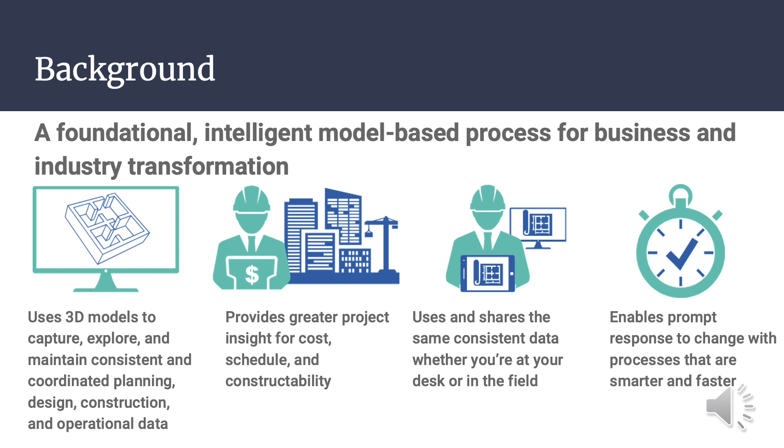As you can see, BIM can be applied into different construction phases, for example, the design, construction, planning, programming, or even the renovation phases as well.

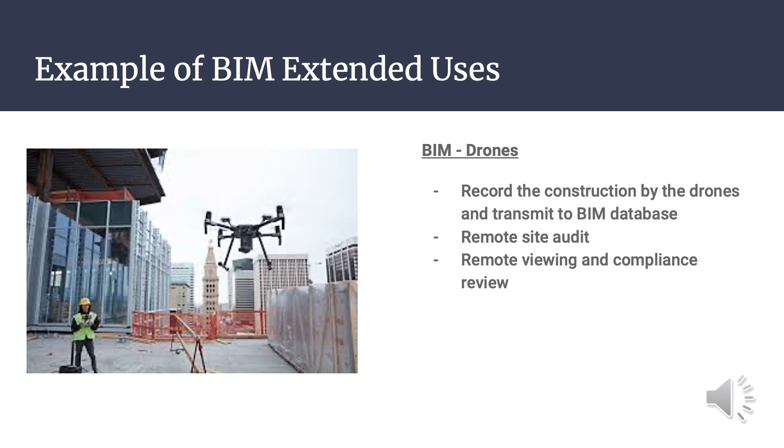BIM drones is one typical example which combines two concepts, using drones for permanent construction records, and assisting with creating 3D models in the BIM model as well.

Now I will talk about the BIM AR concept. BIM AR is a mixture of the virtual and real environment, where AR allows an experience of a virtual object to be displayed in the BIM model. This mixture can provide an additional layer in a mobile device to showcase the building information, and it can provide information from an operative perspective, for example, the installation location of pipes and cables.

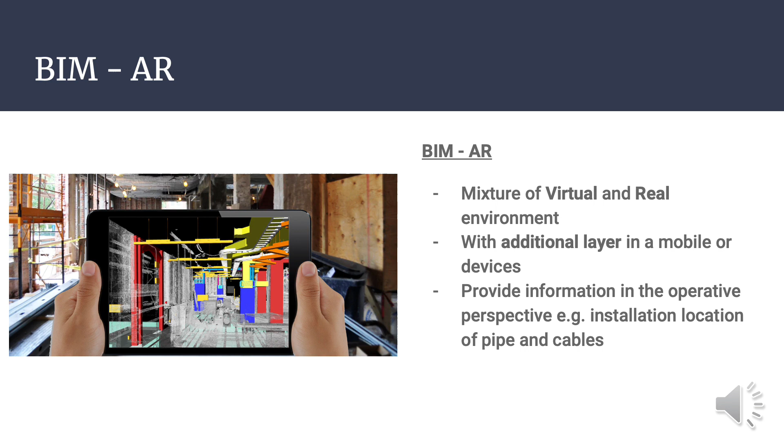There are 3 types of BIM AR. The first is tabletop BIM AR, which registers and tracks the marker of the engineering plan and generates digital content to be displayed on the marker.

The second is the portable AR BIM, which tracks specific features, for example of a particular pipe, and it can change by tracking the user's movement and motions.

The final one is remote monitoring BIM AR, where calibration is conducted through analyzing video or pictures taken virtually, which is very convenient for managing the site situation remotely.

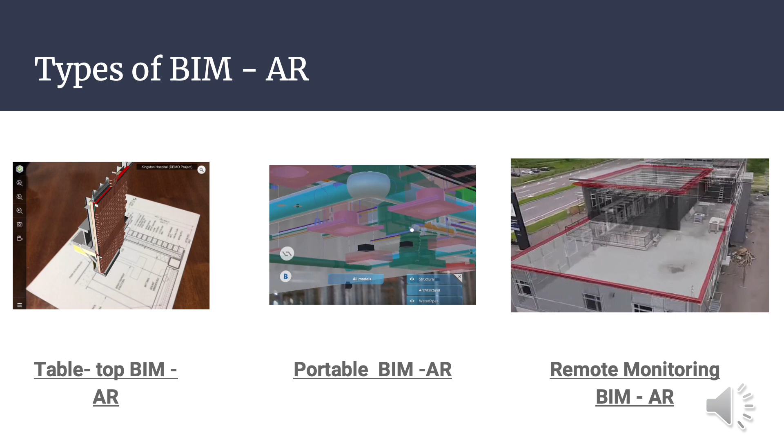The corresponding software is also crucial to BIM AR, as the BIM model will be exported to a powerful 3D engine platform.

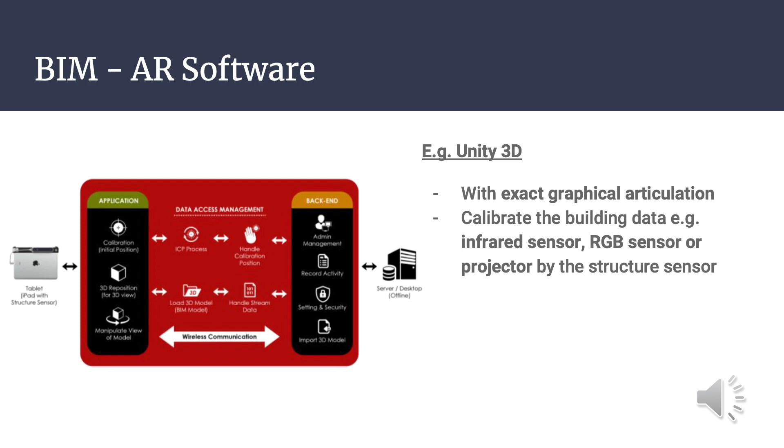To further investigate the feasibility of integrating BIM into the construction industry, we carried out an experiment using HoloLens, a mixed reality smart glasses developed by Microsoft.

By demonstrating a fully articulated hand tracking system, HoloLens allows workers to easily drag, enlarge, or move a particular component for alterations or design. It also keeps track of the user's eye movement, which shows images or applications on a specific area of a virtual screen.

Actions will be implemented according to our voices as well. Not only does HoloLens recognize the user, it also recognizes the space.

During our experiment, when two people put on the glasses at the same time, we concurrently see the same object. So when someone spots a mistake in the early design stage, everyone in the team can be notified by looking at the same setting, which minimizes on-site problems.

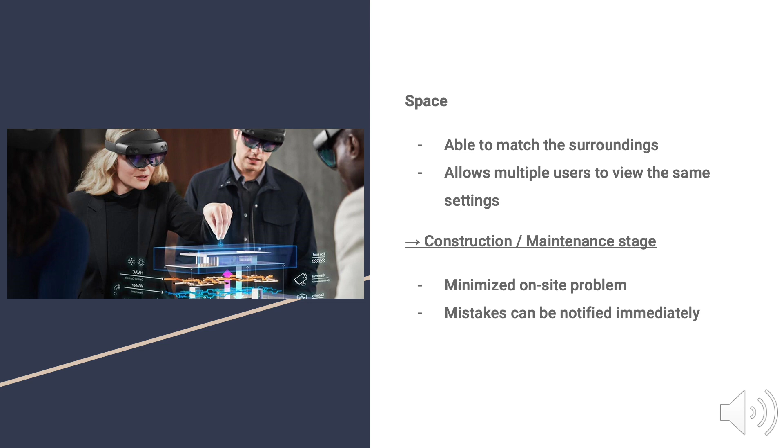Although we did not have the opportunity to simulate AR technology in a real setting, the construction of the head office in Finland is a great example to identify the connection pipes, beams, and columns using HoloLens.

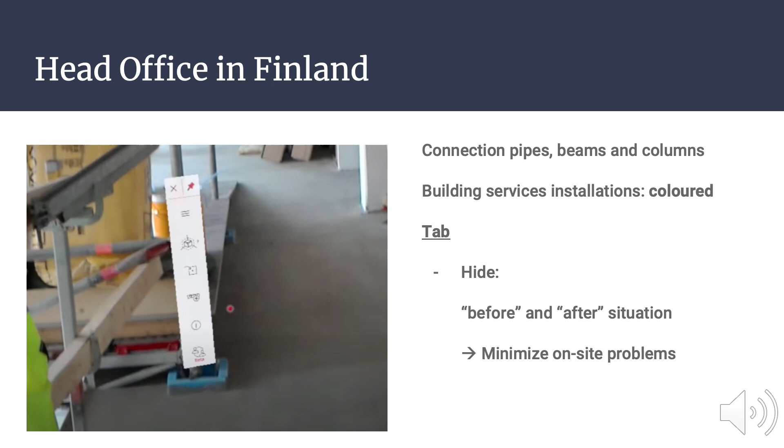The topmost selection on the tab is to hide virtual components. This function allows construction professionals to virtually glance at the before and after situation of the building services installation in advance. However, we have experienced some limitations when using HoloLens.

First, when we were moving from one gesture to another, the tab could not catch up with the order, resulting in a minor delay of 1 to 2 seconds. Although a remote control is accessible, there is only one button for option selection, which is not as sensitive as our hands for sure.

Second, when we placed a fast-moving object like a human running in front of the lens, the window tab suddenly disappeared. While the lens works perfectly with a still background, this limitation should not be neglected when speedy movements are present on a construction site.

We've also experienced failures in detecting different voices. The system could only detect the first user's voice, whereas subsequent voices were not able to be recognized. After conducting a hands-on experience with HoloLens, we've concluded that the sensitivity of the system could be improved.